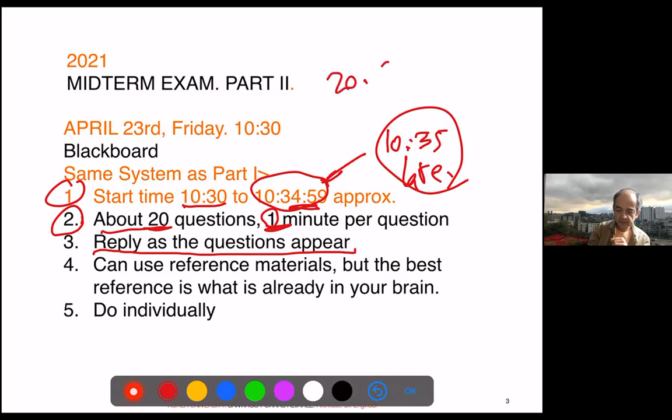20 questions, about 1 minute per question. Good question. 30 minutes. Somebody was asking about 30 minutes this time. Did we do 30 minutes last time? Okay, so I may think about it, it depends on the difficulty and the complexity of the questions. So it will be between 20 and 30 minutes, okay? Let me think about it. But the question is to have enough time, but not too much time.

You can use reference materials, of course, as you wish, but please remember that whatever is in your brain is the fastest. So you may look for specific data, names, words, whatever. So you have to organize your information. But if you have one question and go to Google and Naver to find what is it about, you might not have time to make the exam, right? So it is why the basic understanding is important. And then, of course, I cannot control it, but you should do it individually. That depends on your own responsibility and your own sense of how to do things in the right way.

So it will start at 10:30 again, and the lecture will start at 11:10. We have a short lecture in which we will introduce the rest of the matter, and we will also introduce the next set of assignments. So we will start already with your own project, but we will explain that tomorrow after the exam.

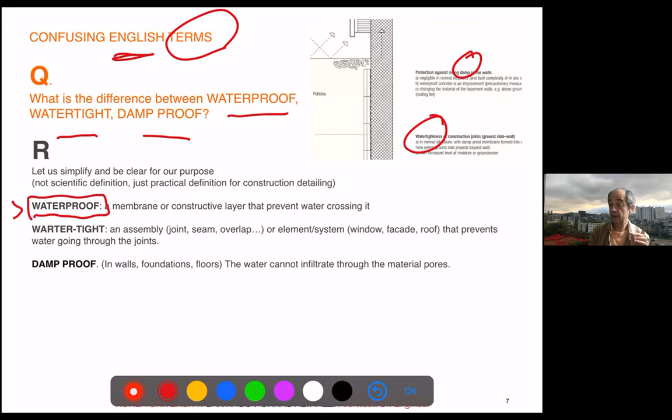So waterproof just means whatever prevents the water to cross it. Well, one layer, one element in which the water cannot go through, right? That's the idea of waterproof. Watertight is more specific, and it usually refers to an assembly, right? Like joints, seams, overlaps, or elements which, like a full system, like windows, facades, roof.

So it involves elements which have joints, right? And those joints, those elements are made in a way that the water cannot go through the joints and of course through the elements. And that is the idea of watertight. You will hear also airtight. That is the same concept. The air cannot go through the joints, the slits. Usually you will not expect the air to go through concrete or brick, but usually through the slits or the cracks. So that's the idea of tightness.

And damp-proof, I never use it because actually there is the difference between water and damp. Water is just a mass of water, right? The damp is like particles of water or drops or sprays, something which is infiltrated, like in the air. It's particles of water in the air, not like a really continuous mass, or the water in the pores of one material, and this is what we call dampness.

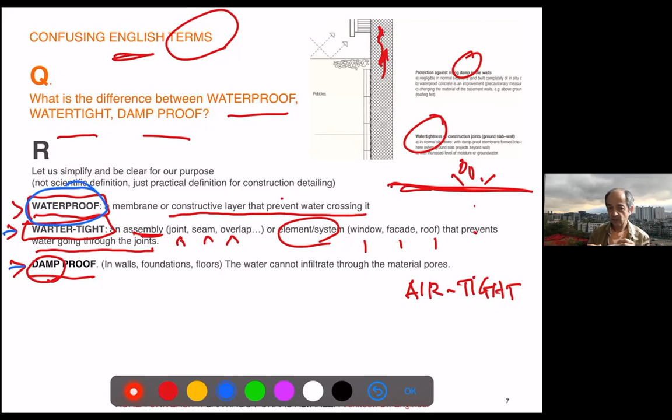One more question about these porous boards which appear in the book, right? So why I speak of a drainage layer, the book speaks about gravel, porous boards, and other elements. So the drainage layer is whatever layer we put to let the water go down. And usually to define it is to have enough open space, like air, right? So the water will not stick. So you have the drops of water, and they have no space to stick into the wall, so they will fall down.

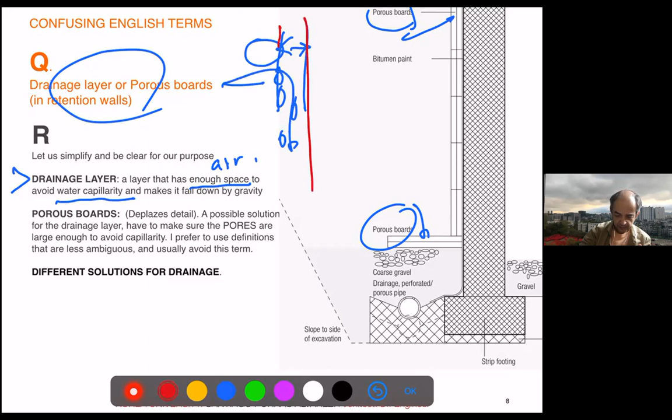So this is the wall. This is whatever device we have to separate the ground from the wall. So you have just a void, air in between. Whatever water goes through will just drip down. If that element is very thin, let me change the graphics, if we make a very thin layer, the water will go through, but will keep sticking by capillarity, right? That's surface tension, so it will not work. So what the drainage makes is gaps big enough to,

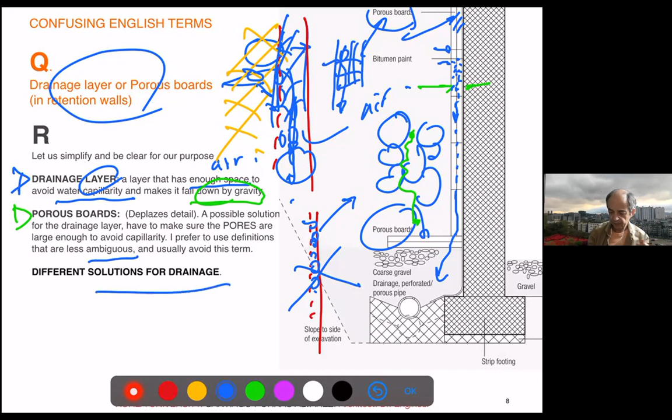What is the problem with the porous boards? Well, that's a bit ambiguous, in my opinion, because that porosity can be too thin, so the water actually will remain there. So these boards should have the openings big enough so the water will always slide down. And this is why I prefer to use a different term, right? And there are many different solutions. So I brought some examples.

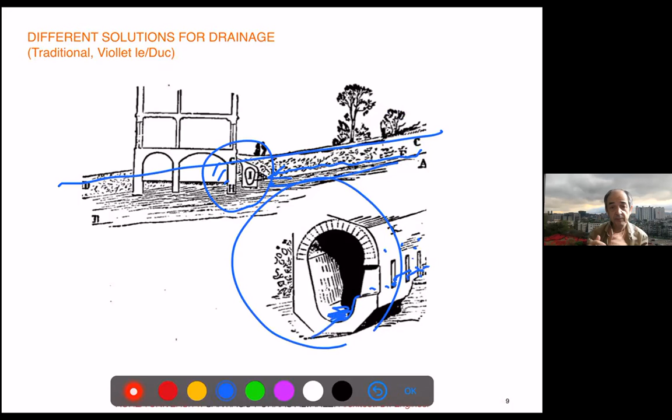This is what we saw in materials, and this is very clear. This is a section of sloped land in which we expect the water sliding down. So what they do before the basement wall is just a full, huge pipe with holes from which the water will slide. Actually, the water will be retained and it will try to go out the easy way, and it will be collected and go down. So that is like the extreme case of that drainage layer.

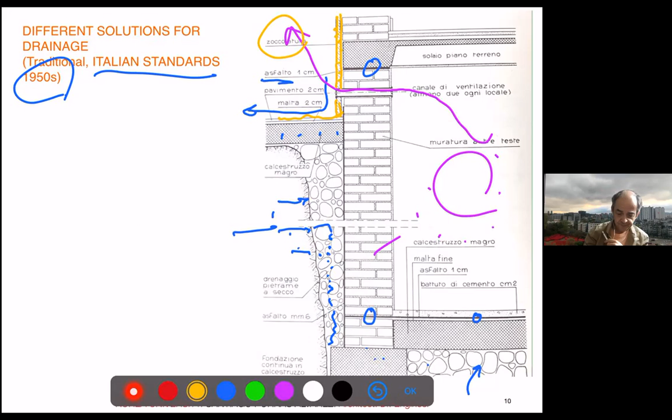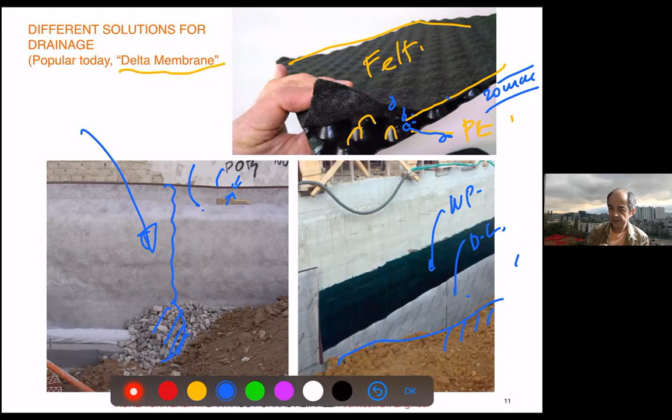This is one photo I showed before. This is one of my constructions in which you can see the polyethylene and the felt. So you can see that small thickness, which will make the water just slide down. And additionally, there's another layer of gravel. This is not exactly how the book shows. And you will always have different ways of doing it, right? So the book just gives you a standard and you will see other ways of doing it, and through experience you test and you change depending on the performance and the circumstances of each construction.

But obviously gravel you have to buy in huge amounts, in huge volumes. So you will try to use as little material as you can. Although I cannot say this polyethylene and this fiberglass is especially ecologic. But yet, if that stays forever in the building, it has a long life, and maybe it's not a big issue.

And I think those were most of the questions I had. They were all related to the plinth, right? And the drainage and the waterproofing. Other questions, I will go through previous years. This is a small collection. I will try not to be too long today, but I don't know how long we may take. But anyhow, we will finish on time. So I will try to go fast because there are many questions. Some of them are more interesting than others.

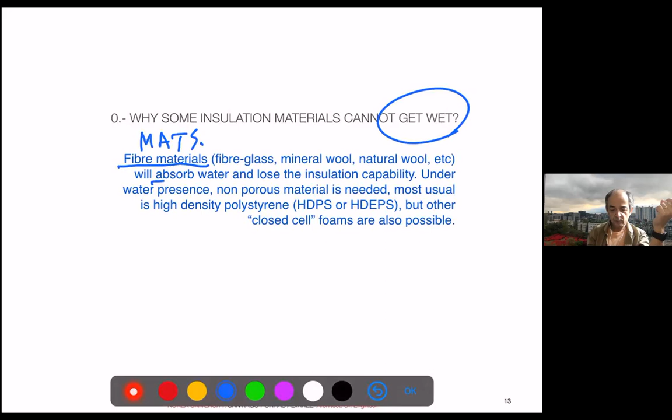So why can some insulation materials not get wet? The problem with insulation materials is that many fiber materials, like the mats, right, are porous, so they can absorb water. And if they get full of water, the insulation power really diminishes. So the most used for waterproof insulations are closed cell. So there are foams that are fabricated with like closed bubbles. So they have the insulation power, but the water cannot go in, right?

So the water will just slide and go out. If you have fibers, the water will just slide in and you have a damp, wet insulation, which will not really work. So that's the point. So this is just closed cells with air. And so the water will always slide around.

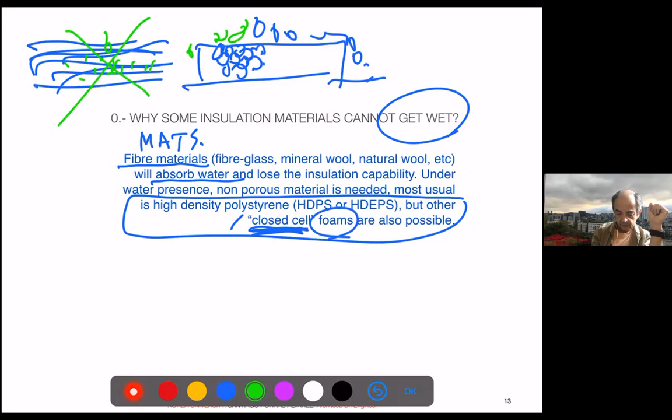What is the problem? The problem is that polymers burn, so many codes forbid them in many cases. That's not the case in Korea, but many codes forbid having polystyrene in a roof or a facade. So how can we have that kind of inverted roof in that case? There are makers that have this kind of fiber elements, which have a coating or some kind of resin that makes them waterproof. This is kind of an old material, but the industry has to adapt to new needs.

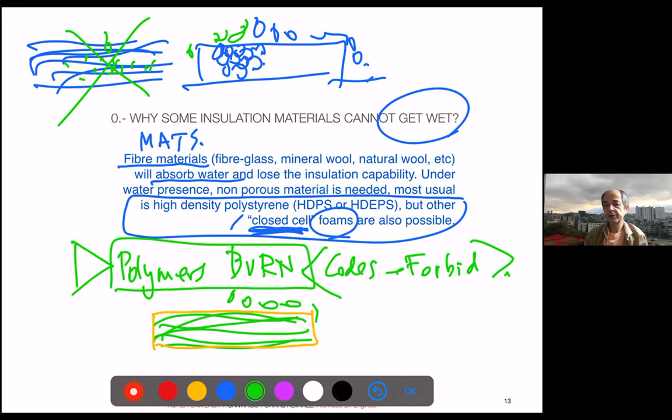We know that polymers burning is a huge problem. We have very recent cases, even here in Korea, in which facades burned just because of the flammable insulation used in the walls. So we have to avoid it.

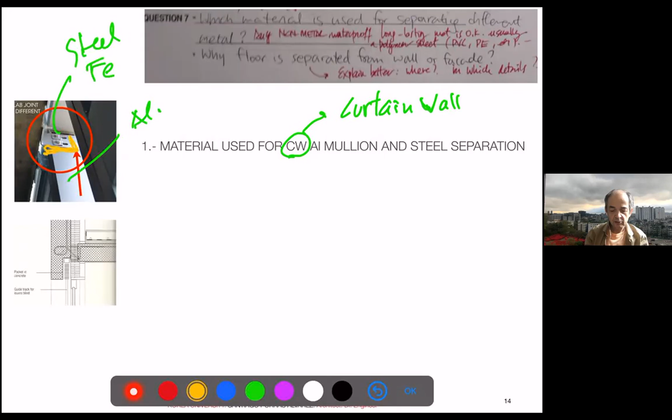That's an important question. Second question, and this is an exam question, so be careful: in curtain walls, CW is the abbreviation for curtain wall. Remember that we have aluminum mullion and steel, which is basically iron with other materials. They cannot touch, so we put some space in between to avoid a galvanic pair. Steel is more noble than aluminum, so aluminum will lose electrons towards the steel and the aluminum will corrode, and eventually those bolts will loosen and the material can come out. So we avoid that by putting a separation in between.

The material used is anything which is thin, strong, flexible, waterproof, and durable. When I asked the experts, the facade consultants, they usually use PVC or polyethylene. There are many qualities and varieties of PVC, so some material which is quite durable and resistant to heat, because it will have sunshine and hot temperatures in summer and very cold temperatures in winter. So it should be a material treated to work in those extreme environments.

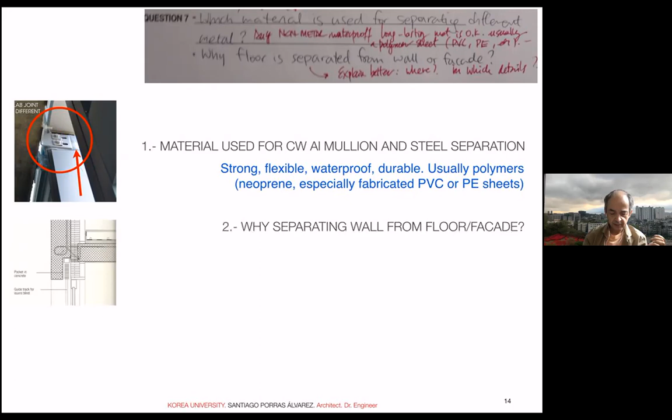Another question is about the detail we saw often in the book: why separate the floor from the facade? You may remember, this is concrete, actually this is a window, but this is a structural wall, structural concrete floor, and there's a gap in between, which is quite unusual because we're used to the advantage of concrete being monolithic. Mono means one, and lithic means stone, so that means being of one piece. This is one of the big advantages of concrete, right? We make floors and walls and they all stick together solidly. So why are we going to break that advantage?

Again, that's because of the trend toward zero energy, to be very efficient, to have maximum insulation. So that's the only way, or one of the ways, to have continuity of insulation without thermal bridges, and that makes a big difference in performance.

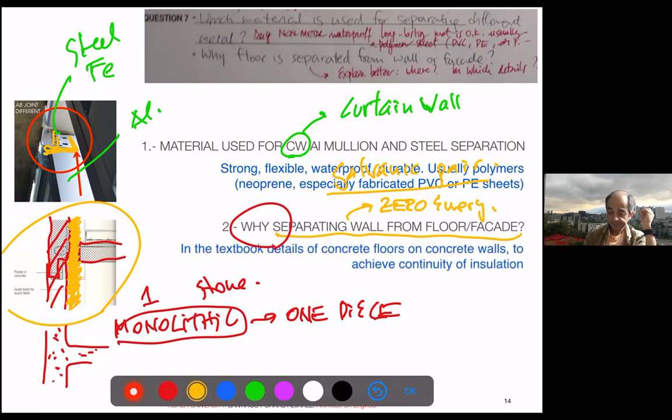More questions: why is the roof slope design asymmetrical? Remember that we have a flat roof, we divide it into bits, and then we find the drainage points, and we make small inverted pyramids to make the water flow into those points. So you have a slope in those areas and they go to the drainage point.

So why are many points asymmetrical? I think we commented on this in the lecture, but usually it's because under the roof you will have beams, you will have walls, elements that you want to avoid, and of course you want the pipes to go to a convenient place. So usually you place them where they will not interact with the structure or with walls, and which will make a minimum distance to a possible vertical pipe. This is why integration is important.

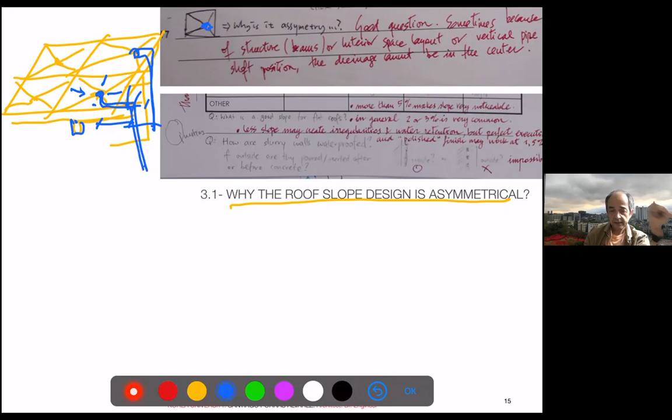And you have to know at least the structure, so you don't have a pipe in the middle of a column, and also with partitions. So whoever is designing the roof will have to see how much space they have to make those horizontal connections, and where to put the vertical pipes without conflicting with the rest of the building's distribution.

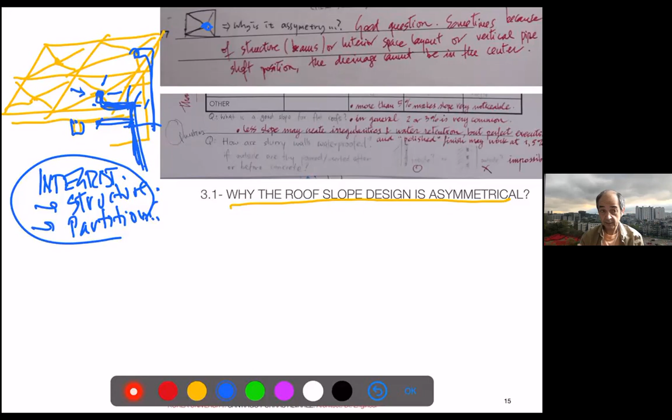And another question: which is the best slope? How much do we have to make this slope toward the drainage point?

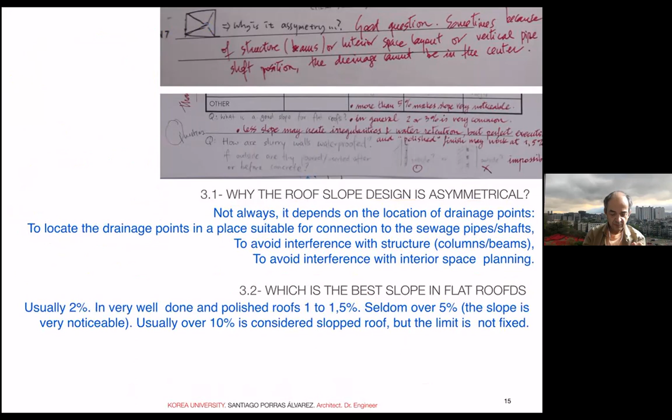That's an interesting question because there's not a perfect reply. Usually we have a minimum of 1.5%. If you go to a very small slope like 1%, small irregularities may cause ponds because construction is not perfect. So to avoid it, we usually go 1.5 to 2%. All the guys try to make as much slope as possible, meaning less time the water stays on the roof and less chance of leaking. If we go over 10%, it's already almost a sloped roof, so it doesn't really feel flat.

Well, the limit is conventional, right? You may have a flat roof with asphalt protection even on a 45 degree roof, but you will have difficulty protecting it with anything, you'd have to fix it. So usually the convention we say is about 10%, like 7 or 8 degrees. But I seldom did more than 5%, and it looks ugly - if you have many bumps, the element doesn't look nice.

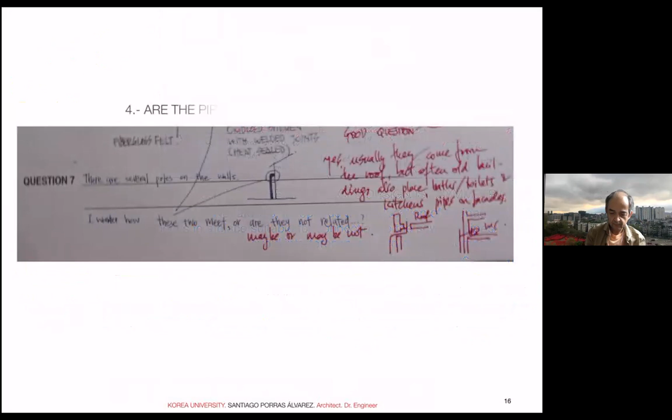More comments on the pipes - this is about roof drainage, right? And it's about the pipes in the facade, how they connect. Actually there are many ways to connect them - going under the floor or even going through the walls. There's many ways to do it.

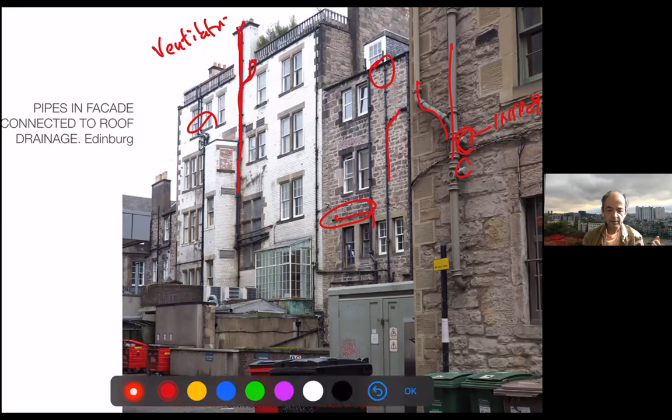So everything is on the exterior and the leaks in the building are minimal. Usually we try to make it inside, but then you have the problem that things are hidden and you have to break things, and finding leaks is more difficult. So this is always a choice of design and the need for maintenance you may anticipate.

But usually fixtures are often done in a different way - they are just drilled into the concrete with a driller, and then you put some kind of fixture element which will tighten when you put the screw inside. It will tighten and it's very safe too, but it works on pressure, so you need a minimum distance to the borders so the concrete resists this tension. Otherwise, if this is too small, the concrete may crack and it will not be effective.

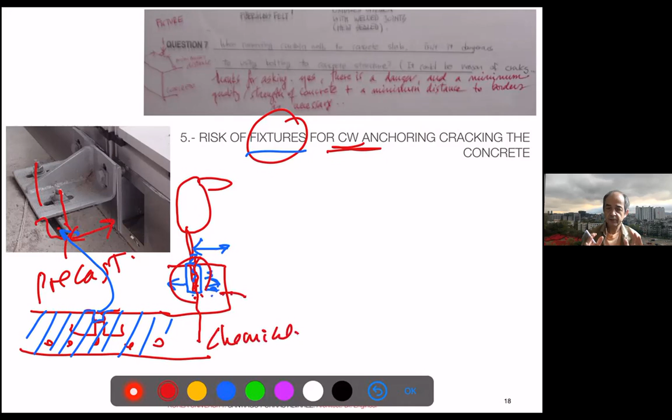That is very well explained by the makers, and the engineers usually take care of it. This is why we always have at least 5 to 10 centimeters, depending on the strength of the anchors. Some anchors are chemical, meaning they don't create as much tension on the concrete, giving you a bit more margin if you don't have much space - that's the case with drilling.

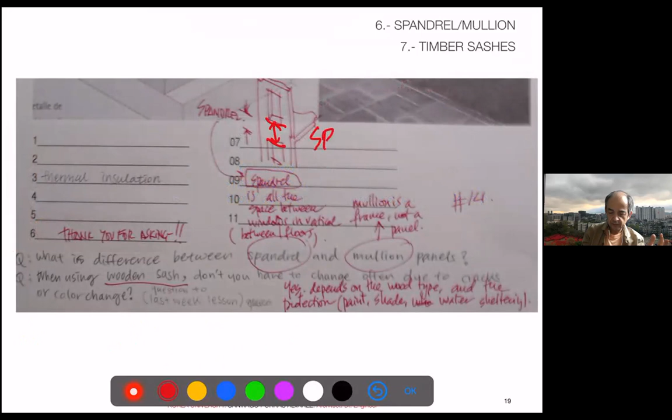Then the difference between a spandrel and a mullion - I think it's again a language issue, and if they are timber sashes, well, the spandrel is the space between two windows. And the word spandrel is the same in Korean - I think Korean, even Japanese, adopted the English word for the space between windows, which usually will also cross with the floor, with one floor.

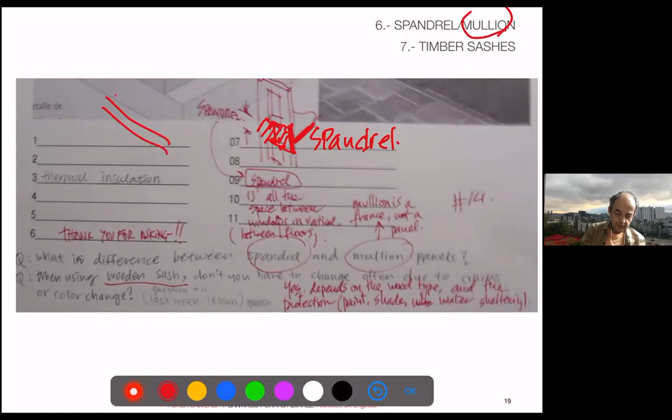The mullions are in curtain walls. If we have one floor, they are the vertical elements which will be fixed to the slab, over which we will fix the glass. So the concept is very different.

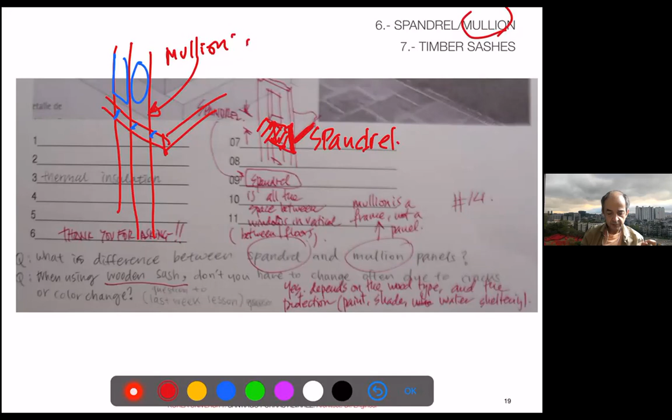So this is the vertical, the facade, a structural element of the proper facade. I think it's mostly linguistic, but just in case: how can we put glass to the curtain wall without silicone?

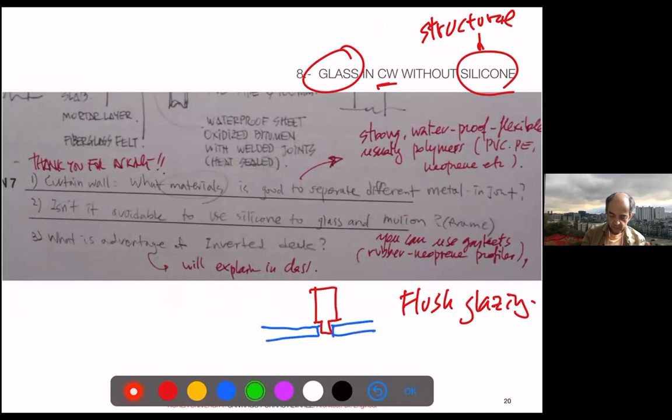We said that actually we have structural silicone, which is probably one of the few choices to make the flush glazing, where you have the mullion and the glass is just put to the exterior without any kind of element outside. In that case, structural silicone, and we also said the strong two-sided tape. If you go to the lecture, we spoke of those fabrications. We depend on that kind of sticking element, that adhesive, of the glass.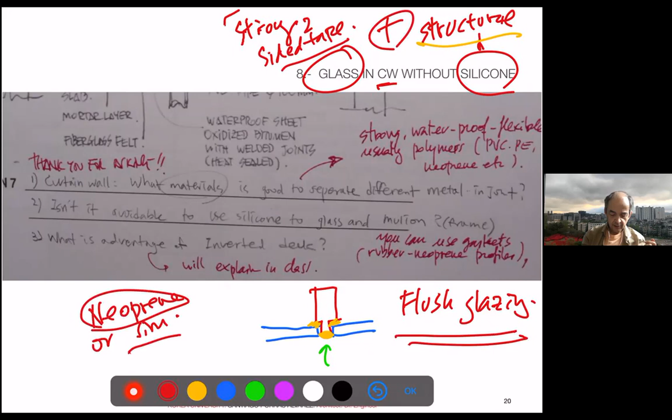There's not much choice in that case. But in every other case, just neoprene or similar, because neoprene is the traditional material, but you have so many polymers around that I cannot choose only one - this or similar or better gaskets. This is safer. They work by pressure, and they are long-lasting and standard. They're fabricated, so you can keep very good control of the construction and a very precise construction.

The problem with silicone is that it's applied by hand, and depends very much on the ability and consistency of the worker. And that's always a problem in construction, because it's not one worker making one window - it's like kilometers of joints in one building made by different workers, and their ability and way of doing may be different, and their precision may become worse at the end of the day when we're more tired. They can be distracted, and things may happen. Whereas the gasket is industrially made, is precise, and has really no possibility of so many errors. This is why silicone, unless you choose one system which relies on it, is a second choice after good quality neoprene gaskets.

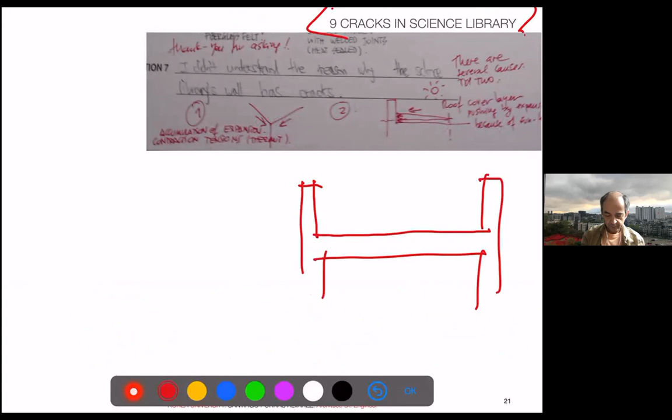Again, cracks in the science library - I think it's very small, but we said if we have a rigid parapet over a flat roof, remember that flat roof has a slope formation, has a flooring, whatever. Those elements will be subject to huge sunshine and also a lot of cold. So this will create strong expansion stress on the sides. So there are two possibilities: either the parapets will crack under that pressure, not so dramatic, or the floor will bump. We saw both things happen.

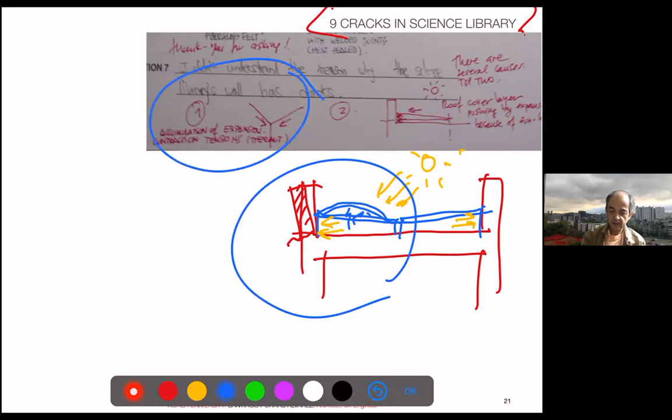That's the problem. The second point, which I think is more obvious in the science library, is that in the corners, you may have sunshine on one side, shade and cold on the other. So one side is contracting, the other is expanding, and there's a lot of tension accumulated. So there is a very common accident of tiles and cracks happening in that corner, because of the differential of tensions and stresses.

This is why there is a tendency to make some kind of joints near the corners, so that tension does not expand so much to the border. So that tension in a, say, 20-meter wall is much larger than in just 20 centimeters or 1 meter - the expansion and contraction will be not so large. So you will try to make some joint on both sides to absorb and minimize this problem.

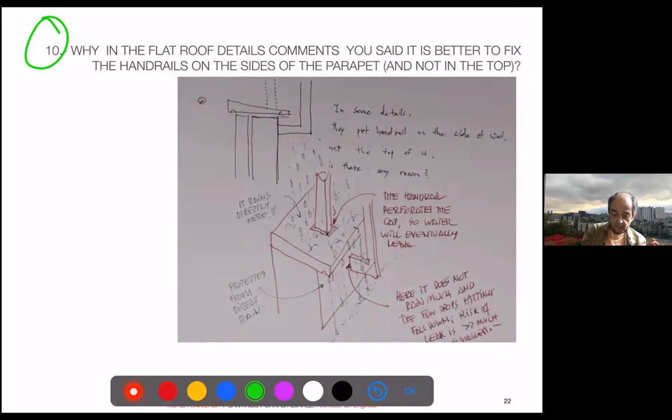Another interesting question, which we saw in some of the flat roofs, is why we put the handrails as possible on the side, not on the top. Let me draw it again. If you put it on the top, you have a difficult joint you have to seal, and you have water just hitting all the time. So this is a very weak point always, and the chances are that eventually it will leak. Also those handrails have a lot of stress, so they keep wind, people supporting them, so they keep moving, and this joint suffers a lot.

If you do it on the wall, you already have some protection, and the water which reaches there is just a minimum fraction of what happens on the top. Besides, by doing it on the side, the chances of perforating some kind of waterproofing is minimum, whereas on the top, this cover element is always a waterproof element. So this is why whenever we can, whenever we have the choice, we always make connections to the side.

That applies also for any other kind of elements, like pipes or chimneys. If you have to have some ventilation, instead of putting the ventilation going through that element, you will go from one side, knowing that the joint of this pipe to the wall will be much safer than the connection of the pipe to the top of the wall.

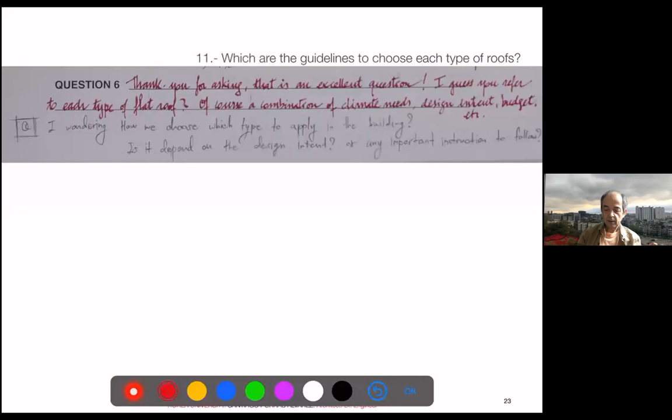Okay, one more question, let me see. So how do we choose each type of roof? Okay, so that's a big question. Often it is a requirement. So you may be in an area of one city which requires you to have a flat roof, or requires you to have a sloped roof to one slope, or which requires you to have a garden roof, as it happens now in Paris. So it depends on the regulations.

Of course, on the climate. So if you make a flat roof in a place where you have a lot of snow, it is perfectly possible, but you have to have a provision on how that snow may be cleaned, because it will accumulate a lot, right? So usually if you have plenty of rain, you will also find some roof which may be more efficient than others, right? So climate or places, also it has to do with culture.

So in many places, like it happens in Seoul, people expect to use the roof as additional space. So probably in that case, that choice is given by the needs of the client. But also it depends on your design, right? On the cost. Usually flat roofs are more simple, are cheaper. Sloped roofs are more complex, are more expensive, but they have other advantages.

So there's many questions you may consider, right? And it is what design is about. So you have to see the problem you have, your choices, and then you choose whichever fits better the design.

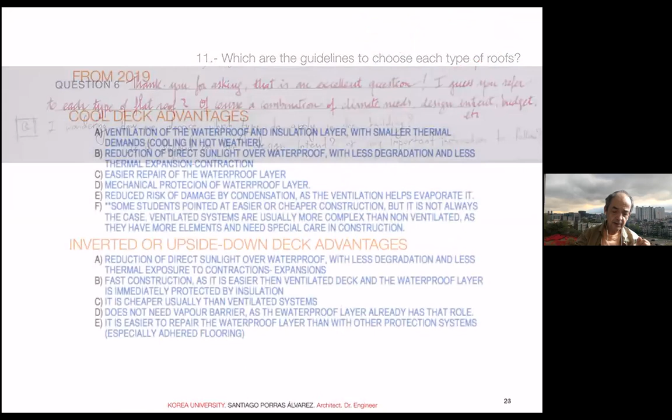I will not read this. In previous years, this is 2 years ago, we tried to check in class the advantages of cool deck or inverted deck. I leave it in the... sorry. This is for you to read and to understand what people think and what we think are advantages or strong points of each of the different kinds of flat roofs. So I leave it for your information.

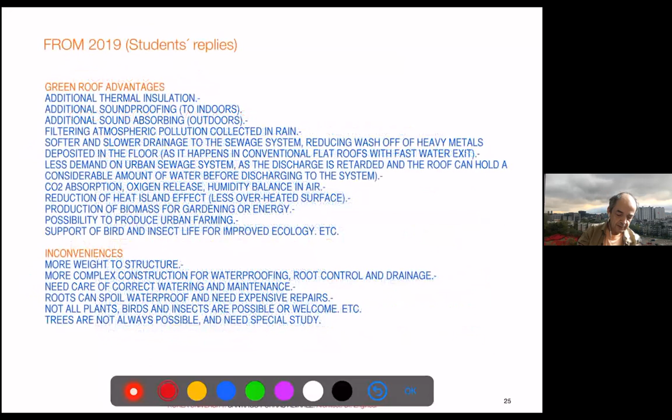And also we had interesting replies I collected on advantages of green roofs, which are a lot, and inconveniences, which are very clear. Actually, it's interesting, you read them and you may find more, right? So the advantages are huge, and this is why green roofs are getting so popular in spite of those disadvantages, which are less than the advantages, but are strong, right? Especially about the weight, the complexity of construction, and the maintenance, and so on.

So it's not easy to see. And curiously, many people said the insects were an inconvenience, but I didn't add it here because we need insects to have our ecosystem working. So this is for your reference. I will not read it, you can do it. More comments about the sloped roofs. We are almost finishing this part, so we can have some time to review some things.

We had this talk on slate roofs, and she asked what happens, will the water not go through those layers and finally enter the timber? This is the principle of the triple layering and the slope. So the 3 layers plus the slope, right? That's gravity working and the physics of the water. It's what we found out by experience of many centuries of building. So if the slope is correct and you make the layering correct, the water has no time to go to the bottom part. Even so, we commented in the lectures, you can go back and see it.

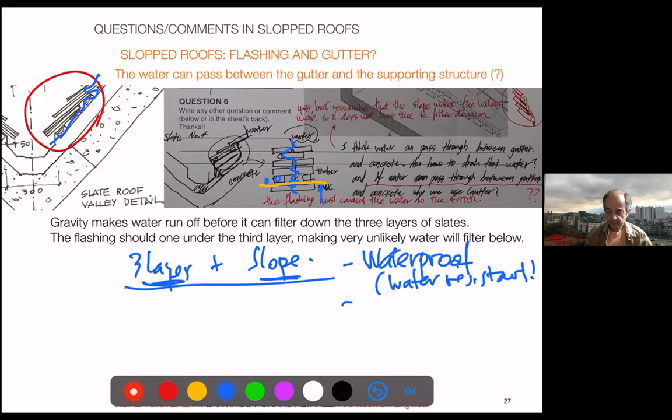Insurance companies are obliging to have an additional layer just in case. Because when insurance companies are risking their money, they will try to be over redundant. That's okay. We said that if you put additional waterproofing, actually it's not totally waterproof, it's water resistant. So that's thought to handle just a few drops, not to be a full first layer of waterproofing, but it should be steam permeable, just to keep the advantage of the ventilation.

So the damp accumulated in the building could go out, and you have the advantage of that ventilation, which is already foreseen in the system. Otherwise, you lose a small advantage, and the building interior will have more difficulty to breathe, right? To get the steam out of it. Also, of course, concrete is quite tight, but still. We will try to minimize the possibility of whatever dampness may remain in the walls being trapped by a very strong waterproof layer. This is why, when we can, we use steam permeable elements.

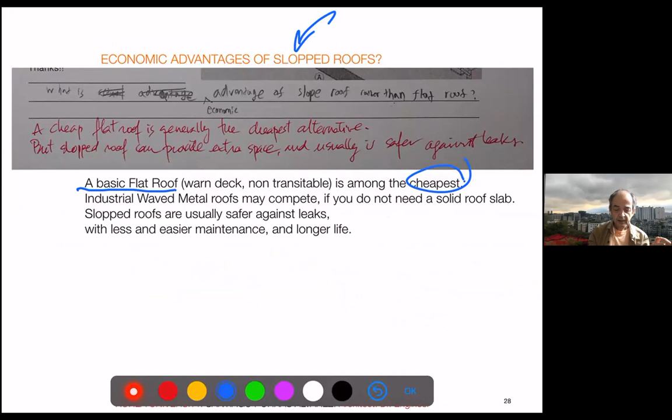Economic advantages of sloped roofs. Well, we commented before, the basic flat roof is the cheapest, and usually very cheap construction. And you can see the apartments go to the flat roof, whatever. You may go to industrial metal roofs and they may compete, because also they are cheap, they are fast to make, but usually they're not very flattering, they are noisy, they are ugly.

So if you take care of that noise, those joints, and make it nice, that advantage will disappear. Of course, if you don't need a solid slab. But again, if you have a nice construction with a light metal roof, your sound insulation, the noise, and the performance of the element could probably be not what you expect. So if you avoid that slab at the top floor and you have a very light roof, maybe very cheap, but you have to work hard to achieve the comfort inside the room.

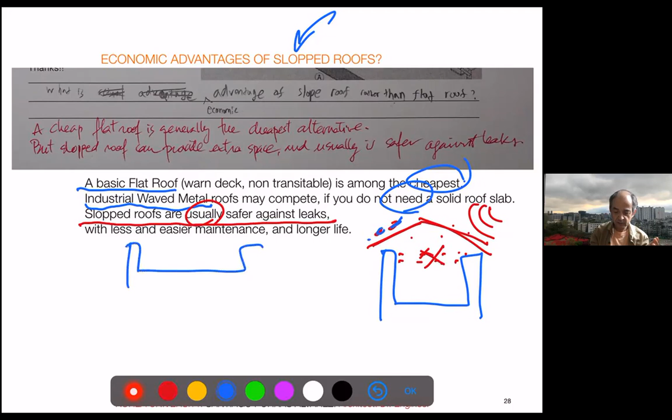Sloped roofs are usually safer against leaks because gravity always helps and the water does not stay a long time, as may happen in flat roofs, in which you may have water for a long time and it may eventually leak. And they usually have less initial maintenance and longer life, because copper, stainless steel, slates last probably forever, but the waterproofing materials have a shorter life. We can speak of 40 years, 50 years in a plastic, and that's great. In terms of the slates, we're speaking of hundreds of years.

And with plastics and rubbers, we don't know, right? And we know polyurethane paint, for example, has a very, very short lifespan. You have to repaint again. So these are the differences. And again, knowing the material, the properties, advantages, and inconveniences is basic knowledge you need to take a design decision in the end.

This was interesting. Why so much complication in the roof detailing? I explained in class the slate roof, which is probably the most complex. Because if you understand the most complex case, then the simpler cases are easier to understand. It's just simplifying layers, right? So in the case of a slate, we explained all the reasons why it is done in this way, why the flashings are this way, why the layering, why the battens and counter battens and the rafters are placed to have ventilation and all those things.

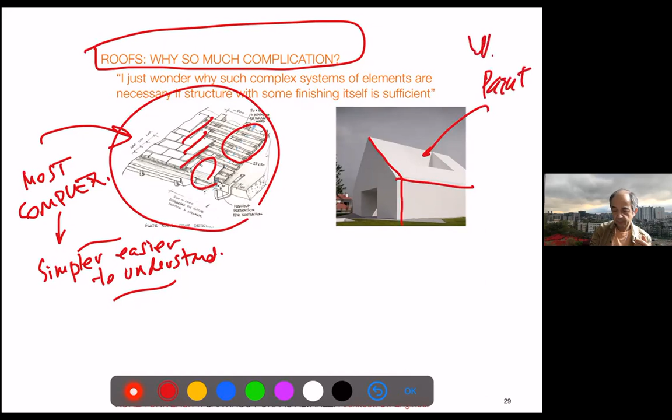We will not repeat. And we have examples in which we have just a continuous, probably waterproof paint exterior. That is a perfectly okay solution, right? But you will not have all the advantages of ventilation. You have to work hard on how to make sure this dampness goes out of the building. And of course, you will have to be very precise in the construction, so you will not have cracks, which will compromise this performance. And you have to clean, because buildings just finished are very nice, but with time you will have the marks of water going down, and you have to clean it.

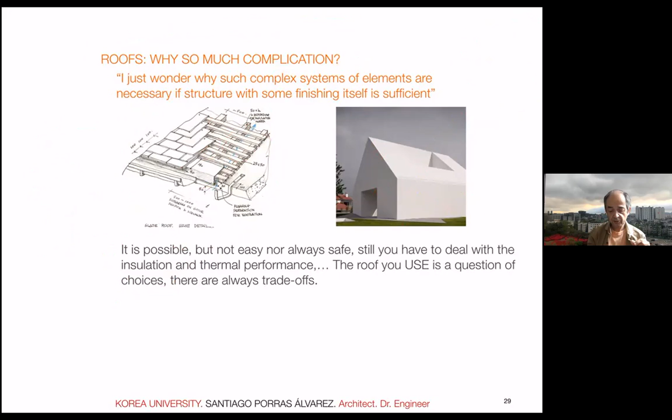So being simple sometimes brings much more complication than using the usual complicated thing, because you are simplifying, you are removing many elements which usually are there for a reason. Okay, this is always one choice, right? So the point is, there's no perfect solution. You always ask, what is incorrect about this? What is correct? And we cannot say something is totally incorrect or totally correct.

There are details better than others, and there are choices which in some circumstances may make more sense than in others, right? So trying to fix the standards and always having the standard solution is good for organizing, but not for the reality of designing, in which you have to really adapt yourself to the specific case. So you have to be aware of the trade-offs, and you will have opinions, and as you work and gain experience, you refine your details, as we all usually try to do.

And well, some people ask why the activities and the exercises, the exams are also difficult, right? So I expect you to know many things, and this is depressing. I cannot concentrate. Okay, so in this case, during the lecture we do little, and the lectures are a bit different, but still, this is a 5th year course, so some of you are graduating, and what I expect from you in 5th year is not the same I expect in 2nd year. And so the evaluation and the way I treat the class is different, because a more mature and more informed student has to be able to do something, while a very new student really needs more help than more mature students. But still,

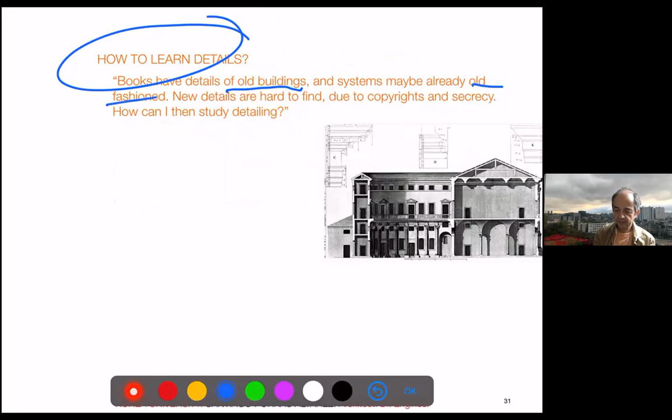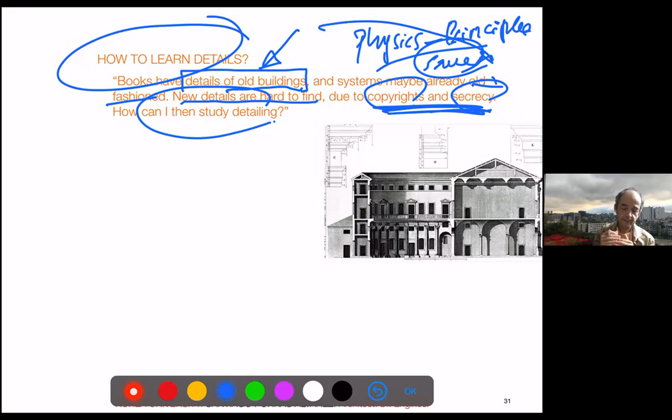This is a problem, right? That's true. It's not easy to find the current details. So how can we study detailing? So I think one misunderstanding is that horror for old-fashioned, old buildings, because the physics and the principles are the same, right? So you need to understand the basics to then be creative, and if it is necessary, to innovate, right? But what is published is enough to understand the basics. So the basics are the same, just the technologies change. You have to understand those basics from the books, right?

You have to analyze the real buildings. The good thing, which goes over any copyright or secrecy, is that the buildings are there, you can see them, and you can look, and you will find a lot just by watching. And then innovating is totally changing our way of doing, for which you need a lot of experience, a lot of trial and error, and a lot of experimenting. So that's a bit risky. You need to have a client who will accept innovating or changing things totally. But without innovating, you can always be creative, right?

That means just adapting that standard way of doing to your specific situation, specific case, right? And this kind of creative adaptation is something you have to do always. Almost never will you find the exact detail for your project. And that creativity is what will make your design really good and solid, because all the concept of the design goes down to the details. And many of the classical examples we see from Asplund, Kahn, Aalto, or even Mies van der Rohe, those details are really, really well connected with the general idea of the design. Those buildings would be totally different if you used totally standard industrialized elements, which are the same for any kind of building.

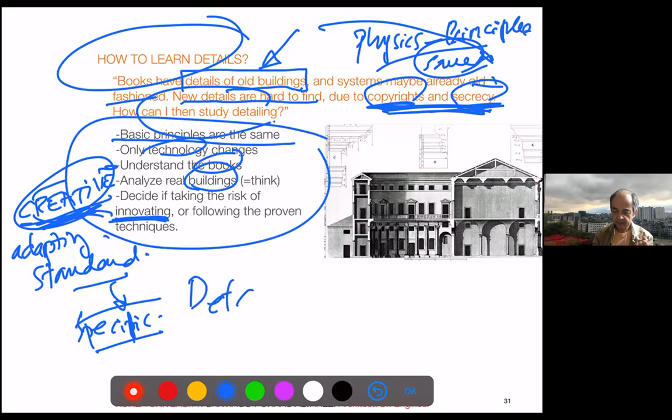So detailing is actually designing, right? And the design ends in the detail point. And that's not easy. It takes years to have a basic idea of designing, right? In general, so detailing is the same. It takes years, and actually, unfortunately, at school you have very, very little opportunity to exercise in this detailing. This is why the materials course and the building systems may be a bit overloaded.

But this is what we have, and if you understand the importance of things, I try to give you as much information, as wide knowledge as I can, within what is reasonable. So you have at least the very, very basics. Actually, we cannot go beyond the basics here. So let's go into some exercises to help with tomorrow's test. I brought here the window detail. This was a very fast redraw, right, of the window. Of course, this is a wood window. So please draw the window details in a way that they are realistic. So this is clearly a window which opens on the right.

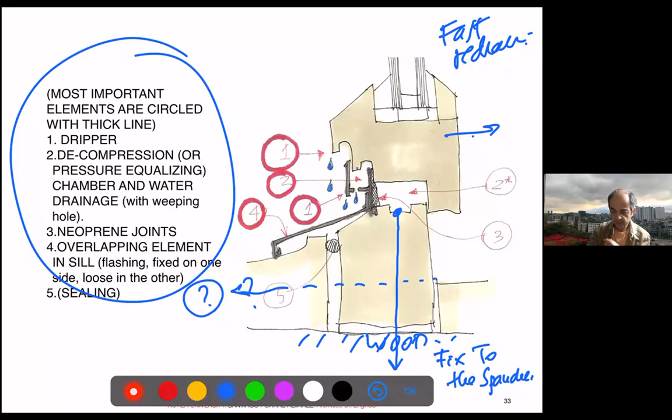The book makes a connection of the window to the sill, which I don't know why they do that. The usual way to fix the window is to the fabric or to the spandrel, right? Which is usually much more solid. Maybe I commented it, but okay, I don't know why the book has this connection, right? This is the usual way of fixing things. And then if the window opens on one side, make all your drippers in a way that they will have space to move. I saw many of you make examples in which those elements are just tightly connected, and that will make the window impossible to open. And of course, there are infinite ways to solve this. This is just one example, right?

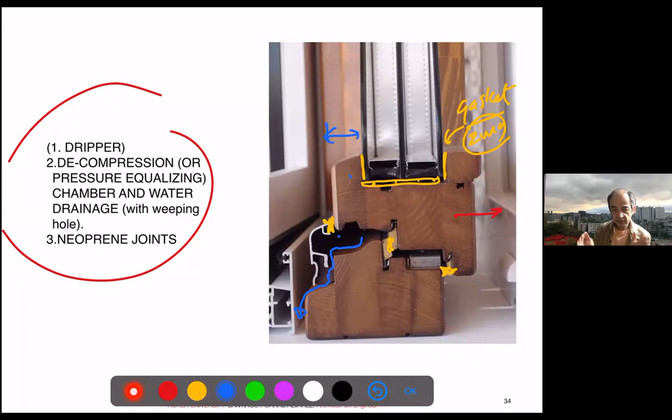See, for example, this commercial window. This opens to the inside. And this shows that those neoprene gaskets, right, can be very thin. So it can be just a 2mm gasket, with the pressure that's enough. This is a sample, so you will not see the support element. That's not a real window. But you see how you always have gaskets in all 3 connections. So all 3 connection points have a very safe enclosure. And then the shape, to have that unlikely but possible water coming in go to the outside, right? With the timber, we need a minimum size, so it is strong enough to hold the glass. But we said if we have a, sorry, let me go back to the window.

If we have steel, we will try to make this as small as possible. And all the additional space we need, we do in the back to the interior, so the water has the minimum possibility. But in the case of timber, PVC, aluminum, the materials are a bit weak, so we need a bit more space to have that strength.

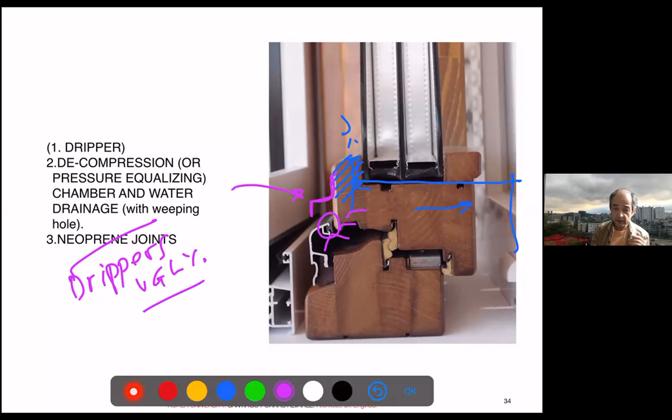And again, there's a question of opinions. Whenever possible, one dripper will add a lot of safety to this point. So the problem is that drippers are ugly, in many opinions, and it's avoided. And then you try to have those fixtures helping with it. But if it doesn't disturb too much of your design, and you can, I would always advise to have a dripper, which really will change a lot the performance of the windows.

And you see that the design is not totally the same, but the principles are mostly the same. And this is what is interesting of understanding the basics, right? The detail we saw from the book is very complex, but with that we can understand other elements and we can see the possible variations. And those variations are actually what are interesting for us to apply in our project, because we are creative, we are designing.

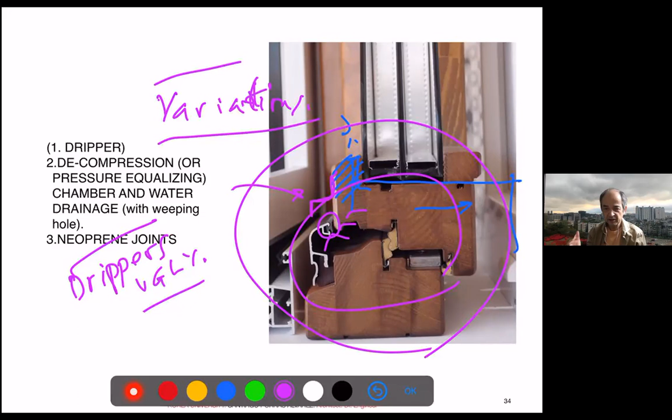Many people are disappearing from class.

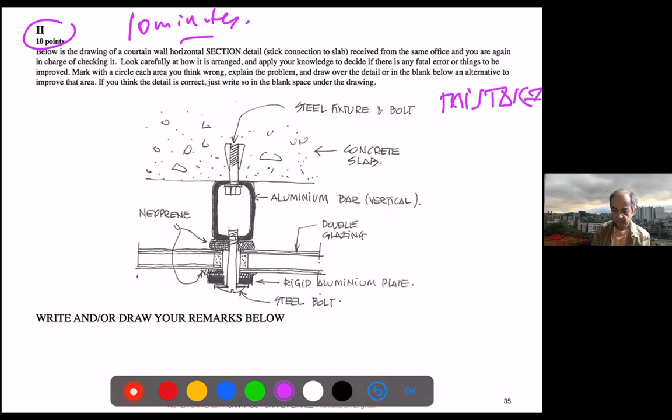This is a horizontal section of a curtain wall, right? And the question is, what are the mistakes? So have just 1 minute and look at it and see what do you think is not correct here. I can give you some hints. Well, probably try to see how many you can find.

Gasket, yeah, the question is a gasket is a kind of elastic strip, right, used in joints by pressure. So it can be just like a small pipe of rubber. When you have 2 elements pressuring on it, it will just be compressed and it will be closed, right? You have gaskets with many different sizes and shapes, but they are strips, and you have a catalog, so they are industrially made. You can find them, right?

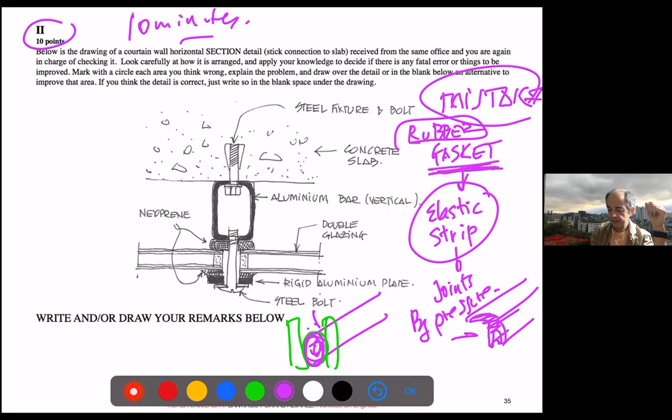And usually gaskets are rubber, but as I said, there are many polymers in the industry, so you may find others. So if you go to window gaskets and curtain wall gaskets in Google, you will find a lot of industrially made materials there. Okay.

So let's go to the detail, and if you looked around, we can see steel and aluminum together, which is something which probably we should check. We have a fixture which has plenty of space, which is perfectly okay, but again, we have steel with aluminum. And besides, this is something I see very often. Right, perfect. Many of you do this. How do you fit that screw, right? It is inside the pipe. Because you can say you make the pipe, and you perforate it, so from the side you can access the bolt and do it, right?

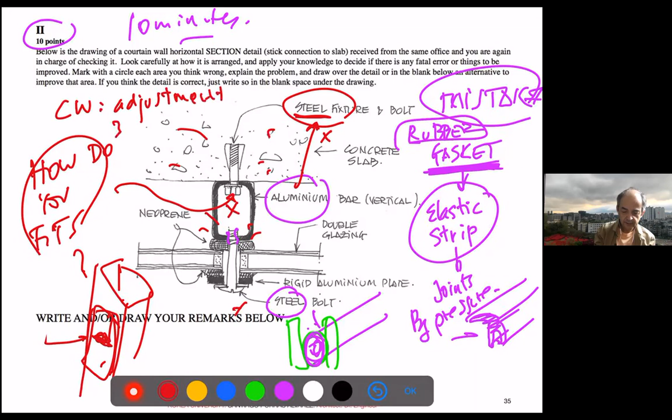But in that case, you are weakening the structural element, and you are making it difficult to construct, but then it should be expressed. So we already have the galvanic pair twice, right? We have one bolt which is impossible to make, and we know that curtain walls need adjustments, right? In 3 axes, because we know the construction is not precise and curtain walls are precise. Here, adjustment is 0, so it cannot adjust in any way. You have not any gap with the concrete, so this is very rigid. There's no independence of movement. It's very rigid, very bad detail.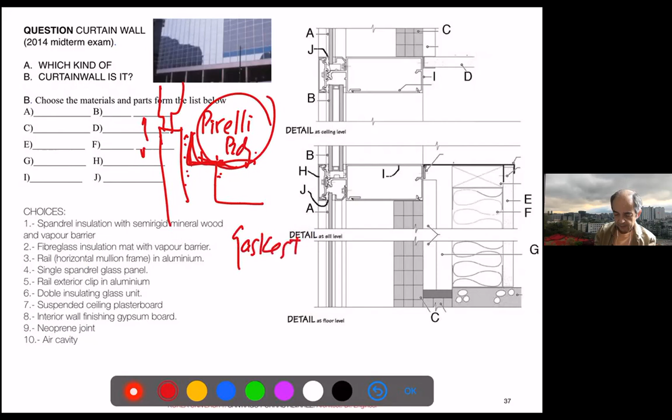In which they have like the best example of that flexibility, right? And of course, yes. So those gaskets, the neoprene, again, the gaskets, right? But the detail was wrong from the beginning. So it's a really crazy way of doing it. You can do that in a small construction, not in a really full building. In a small, temporary construction, you will not care so much because dimensions are very small, and you may simplify a lot, right? But it's not a good way of building.

So again, usually the choice of the material is something more of a materials class, but it also helps exercising on finding the parts of the curtain wall. I put here the photo. This is a very standard curtain wall. This is not famous architects, just from the handbook. The first thing we have to do in the details is to identify parts, right?

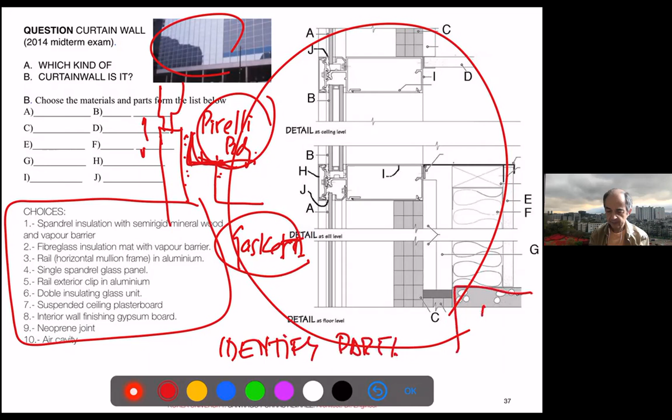So we see the slab. This is the spandrel, clearly. So we can assume that one part of this is going through the floor. The rest is windows, right? So it's probably next to the spandrel, because we have a solid part, and this is the window, right? We can see the glass is easy, and actually we have only one layer of glass because we have insulation. We have double glazing. And then we have the important elements.

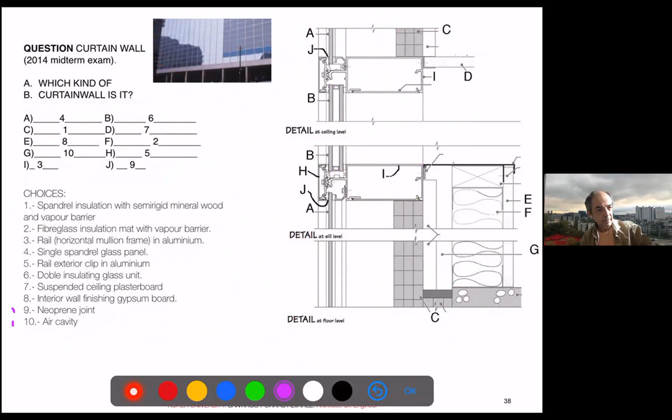The mullions will be projected on the back, so probably they will be consistent with those horizontal elements and so on. And then we can just find out which is the most appropriate material for each, which we have in the following slide, right? I'm going fast. Actually, I wanted to watch one by one with you, but you can check, and the choices here are actually very easy. A little bit tricky, but again, if you have 10 choices, that means 10 minutes.

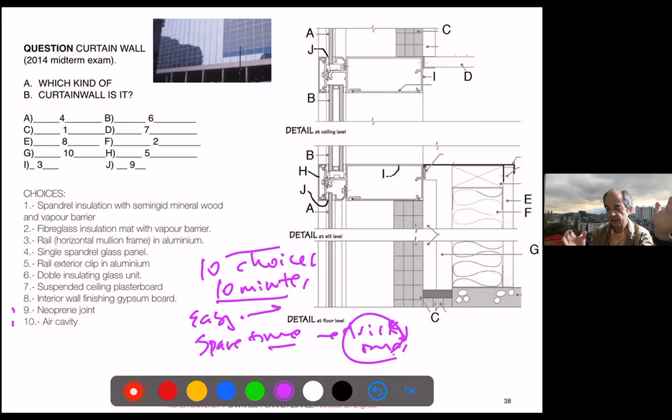You have the easy ones, which you can see immediately, and then you may have some spare time for the more tricky ones, right? The problem with the Blackboard system is that you have to reply one by one. But again, when you're sure, you reply fast, and you give yourself a bit more time in things which are difficult. The exam will have very, very easy, almost obvious questions, and a little bit more tricky ones. Okay, so you have it here. You can have a look. So it's not really hard to see.

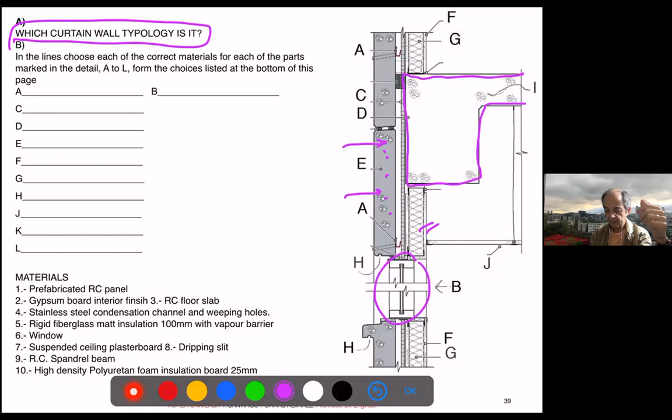This is another example, and again, which kind of curtain wall typology is it? So we can see concrete elements, right? We can see the slab with a big beam. We can see insulation inside. So we can see that the window is independent. So we can see there's heavy prefabricated panels, right? But they're not unitized because the windows are apart.

Then to understand the elements very clearly, we can see the concrete, the joints, the slab, some intermediate element and a very clear insulation side, right? The window is obvious, the dripper is obvious. Again, the dripper is repeated, right? You have a small drainage channel, which you can see here, to collect the possible condensation and the possible leaks in the wall. You have the gaskets. So actually, you can see the insulation, the plasterboard inside, the suspended ceiling, the slab.

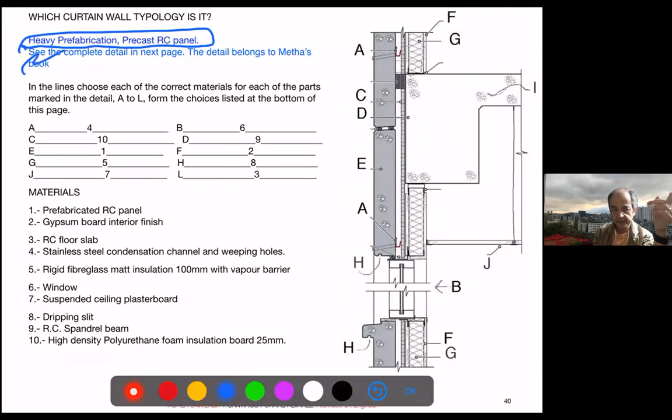So most of the questions are quite obvious. And then you have the elements, right? So heavy prefabrication, precast, reinforced concrete panel. And ignore this because that will be in the handout, not here. And you see that we have two kinds of insulation, right? And this is where the graphics are important. And I think the Mehta's book is a bit confusing in that sense.

So usually soft mat insulation is this kind of wavy element, and rigid insulation is more like this kind of square elements to show the cells, right? So we have the rigid fiberglass or the polyurethane foam insulation, 25 millimeters. So in this case, this is fiberglass, and this is the polyurethane foam, right?

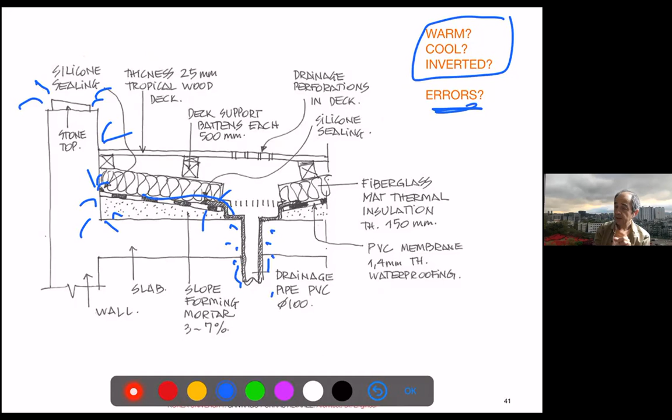But don't think it's easy, because these kinds of errors, not all together, but some of them, are very common in real life, and you have to be able to spot them fast. So it's of course inverted and cool deck, and these are the problems we saw—at least 8 different misses in this, including the insulation, which actually should be waterproof, which I didn't comment on.

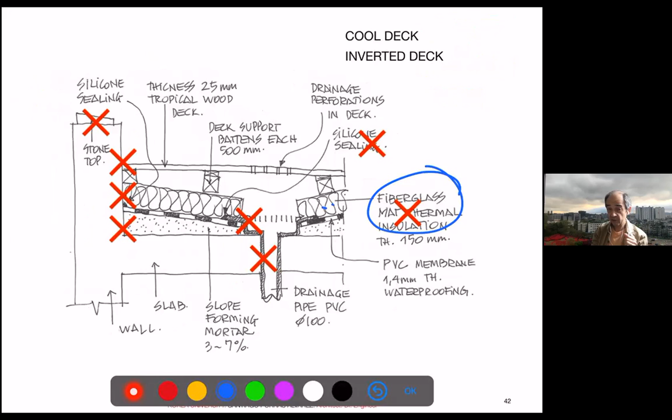We have another case. Again, the questions are easy, and you will see it later—I'll let you think about it, because we are almost ending the class, just 5 minutes from the end. This is a bit more tricky because you have the photo and the detail, and I don't give choices. That's not the kind of question on the exam, but it's a very good exercise.

The first part is very easy. If we see the details, we have the flooring and then the garden on the other side. So this is kind of an inverted view. But we can see the slope formation, kind of separation felt, insulation—remember it's very common to draw insulation in yellow. From what we saw at the beginning, we can understand this looks like a drainage layer, then another separation element, some kind of drainage, again felt, and then finally the planting part.

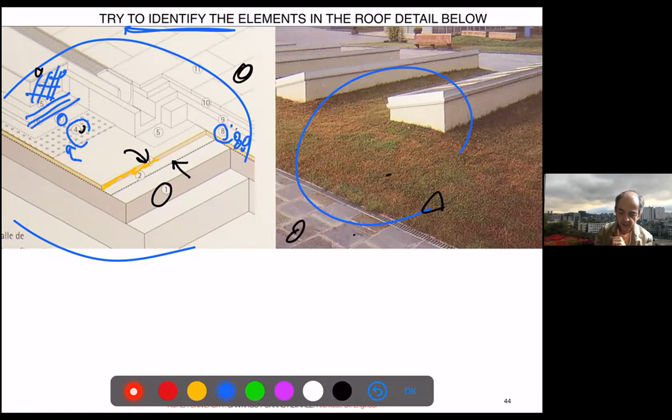In the other case, we probably have gravel and some cement mortar to fix the tiles, and the tiles themselves—of course we have to guess. This is why it's not an exam question, but it is quite a nice exercise. So here you have the details as it was published, so you know what is really used.

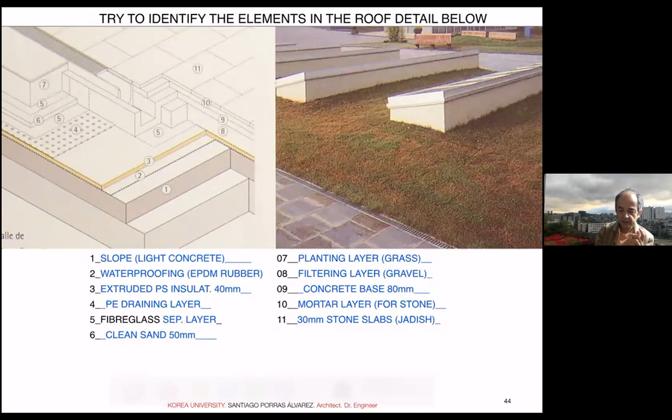Probably, if you look there, I got almost all of it right. Maybe the one I said is a felt—it's kind of additional waterproofing. But again, this is redundant, mostly because of insurance, not because of the need of the construction.

Since we have to finish, let's go to the final test. Sorry the details went a bit fast, but I wanted to cover a lot. For the exam, remember that most of the questions for practical elements—of course there are theory questions too—but about details, they are mostly about finding mistakes. So train your eye to see what is missing in some part.